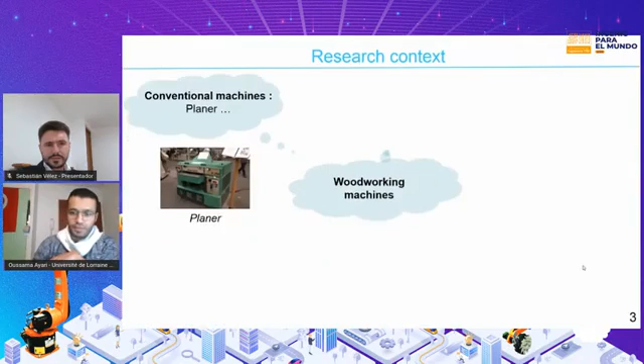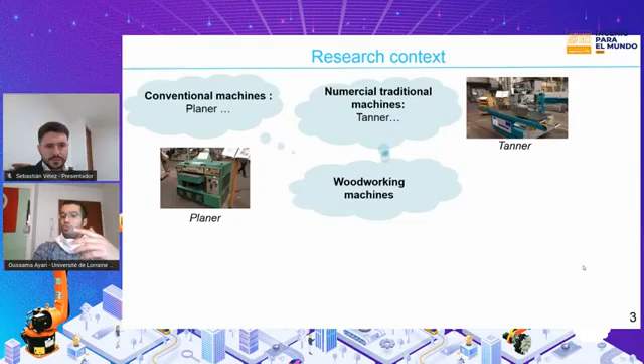So let's start with the research context. In the wood manufacturing industry, we find a lot of woodworking machines, like conventional machines such as planers, numerical traditional machines like the Tanner. We also find the CNC router, which is frequently used for milling wood and which can have 3, 4, or 5 degrees of freedom. And we find also, but rarely, industrial robots. Our work will be interested in this kind of machine.

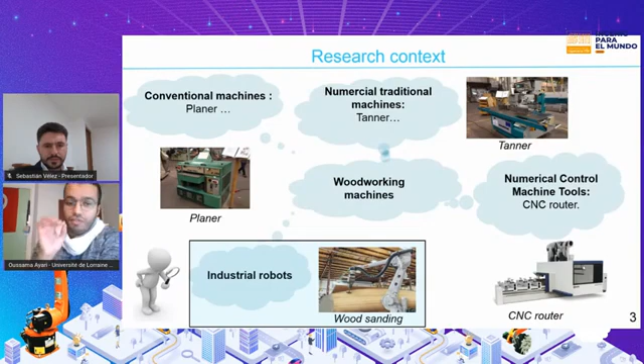So, talking about robots, there are many types used in the manufacturing industry, such as autonomous robots, AIV, meaning automated intelligent vehicle, and AGV, automated guided vehicle. As you see in front of you in the photo, I present a police robot. It's a robot used by the Tunisian government during the lockdown after the coronavirus pandemic. They use it to control citizens, to check if they are respecting health restrictions, if they are in good health, and a lot of other things.

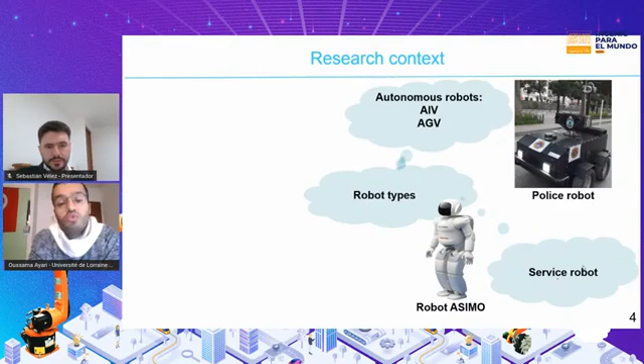So, the second type of robot is the service robot. As I present in front of you, the Asimo robot is frequently used in Japan, which can be used, for example, like a waiter in a restaurant, like a barista in a bar, and most frequently in retirement houses in order to support elderly people.

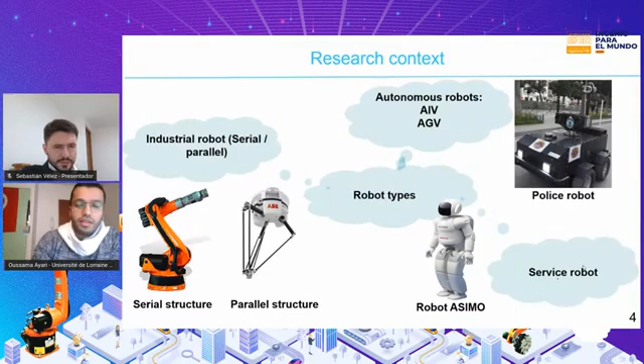And we also find industrial robots in two structures: the serial structure and the parallel structure. Our research will be interested in serial structure industrial robots.

Concerning numbers, the installation of industrial robots has not stopped growing since 2005 and has accelerated with the appearance of the concept of Industry 4.0 in 2011 and the trend to automate production lines. These two factors led to a number equal to 420,870 units of installed robots worldwide.

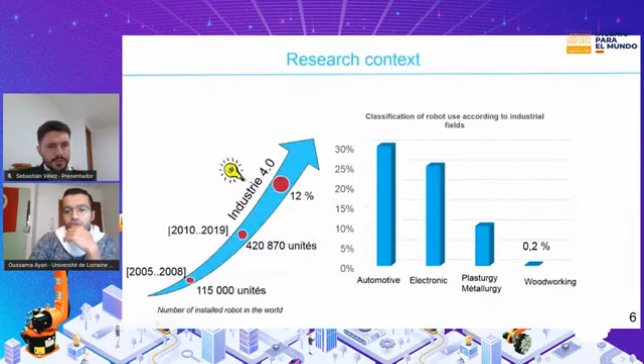The IFR, the International Federation of Robotics, forecasts in her statistics almost a 12% increase in the number of robots installed in the world by the beginning of 2021. But with the appearance of the coronavirus, we don't know until now if it will affect this number or not. Maybe it will increase, maybe it will decrease. We don't know until now.

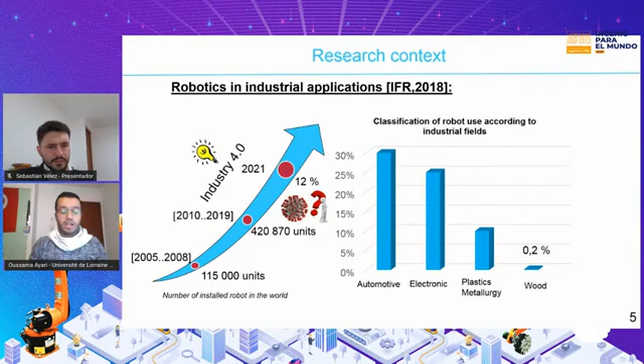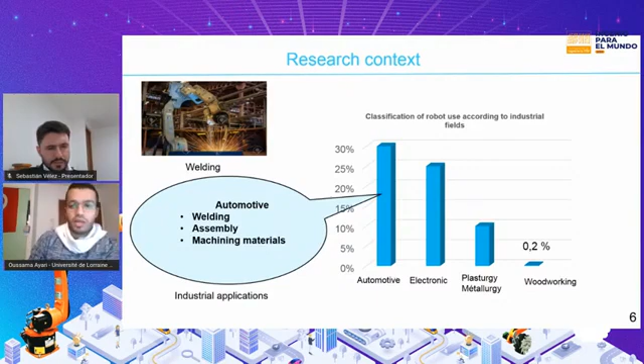So concerning industrial sectors, I'm talking about industrial robots in their serial structure, like the arm robot. Automotive field is always the first customer with 30% of the total number of installed robots, frequently used in applications such as welding, assembling vehicle or car components, and machining materials like aluminum, iron, and other kinds of materials.

The electronics industry comes in second place with 25% of the total number of robots installed in the world. They are frequently used to contribute to the handling and assembly of electronic components, as well as the development of sensor networks.

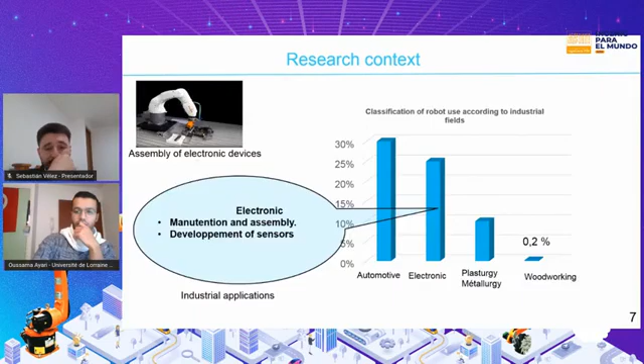In third place, the plastic and metal processing industry ranks in the world with 10% of the total number of installed robots, generally used for plastic machining or molding applications.

What surprised us, as people working in wood manufacturing, is that the wood industry is ranked last in relation to the previously mentioned sectors. The percentage of used industrial robots in the wood industry is not superior to 0.2% of the total number of robots installed all over the world. So it's surprising for us. It's weird, so we started making questions about that.

Why do other sectors like automotive, electronics, pharmaceutics, aeronautics use robots, and the industrial robot proves sufficient and suitable for line production, but we cannot use it for the wood industry?

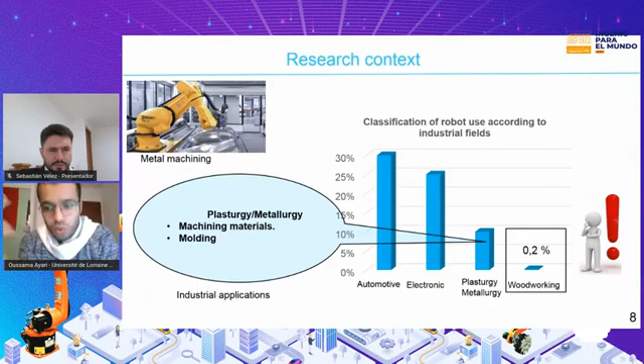So by making our research and our state of the art, we found that among the 0.2%, we find industrial robots in the furniture sector, still talking about the wood industry. We find it in the furniture sector, such as at Schmidt. Schmidt is a big company here in France, specialized in construction of kitchens.

They have like 40 robots, always arm robots - I am talking always about arm robots. So Schmidt has 40 robots used for loading and unloading wood panels on cutting machines.

There are also other applications, such as at Bourneuf, which uses a lot of arm robots for painting furniture. As far as wood construction is concerned, solutions are beginning to emerge.

For example, with Emax Pro. Emax Pro is a company in Belgium, a developer of robotic solutions for the wood industry. It has set up a small other company called A2C, specialized in drilling, carving, and nailing with arm robots, with industrial arm robots.

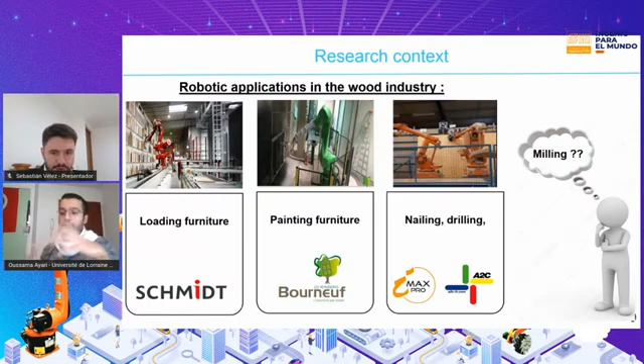So the goal or purpose of our research is to use serial industrial robots for milling, which has many advantages. First of all, production is more flexible in case the manufacturer needs modifications of the product. The robot program can be changed and modified without stopping the production lines.

Pay attention about this: now, for people using CNC routers or other equipment, if they want to change the program in order to personalize their product, they need to stop the production lines to make modifications.

But with the arm robot, the advantage is here with a concept called offline programming of robots. We can change the robot program without stopping the production line, which avoids losing money. The second advantage of using industrial arm robots for milling is a larger workspace in case the manufacturer needs to machine complicated shapes.

So let me first of all explain what a workspace means for an industrial robot. The workspace is the set of points that the robot can reach in space. For a CNC router, it can reach a lot of points which make the shape of a square. But for arm robots, we don't have a specific shape of the workspace, but the definition of workspace is the set of points that the robot can reach in space. So this is the second advantage.

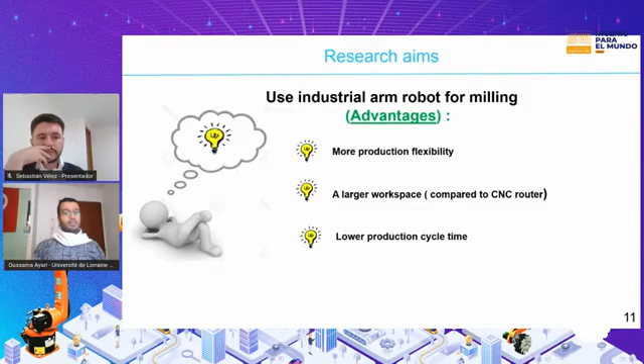The third advantage is we have lower production cycle time. Of course, with robots, as I said, if we can change the program directly without stopping the production line, we can earn time. And earning time means earning money, earning dinero.

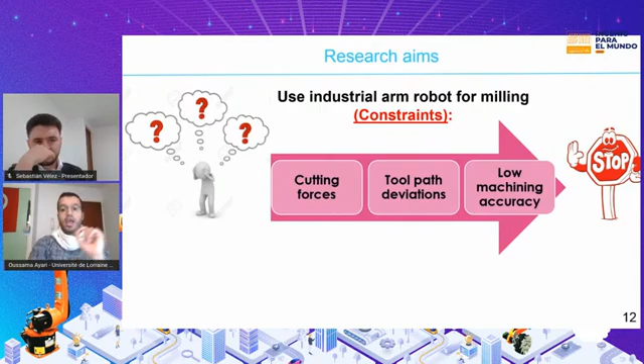But unfortunately, these advantages are faced by a lot of constraints, the most important of which is that when the tool removes material, important cutting forces are created, which cause toolpath deviations, and as a consequence we get low machining accuracy, and the machined surface will be very bad.

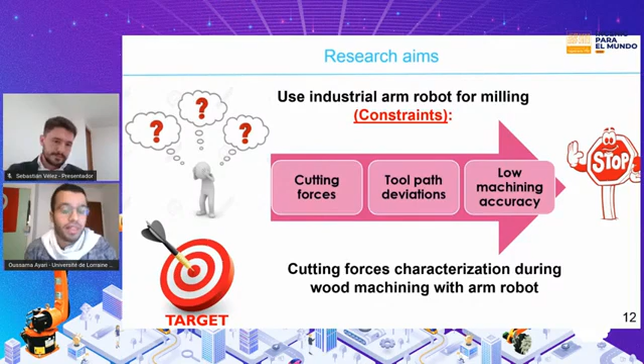So the target of our research is to characterize the cutting forces during wood machining with an arm robot. In other terms, we want to understand the phenomenon. We want to know those cutting forces in order to manage them: if there are important cutting forces, whether there is a solution to reduce them or to reduce the toolpath deviations. So now, after I explained the context and the aims of this research, let me present the devices and protocols used for the experiments.

First of all, and this is the most important device that we use, our experimental bench is composed of a poly-articulated or anthropomorphic arm robot. These terms are all names of an arm robot. We can call it a poly-articulated arm robot or an anthropomorphic arm robot. It is a KUKA KR 210. It has 6 degrees of freedom.

The last 3 axes of the robot are concurrent and allow it to emulate the moves of a hand wrist, as you see here in the last axes 6, 5, and 4. Their axes are concurrent, and they emulate the moves of the human wrist. And the first 3 axes, axis 1, axis 2, axis 3, serve to position this wrist in the workspace.

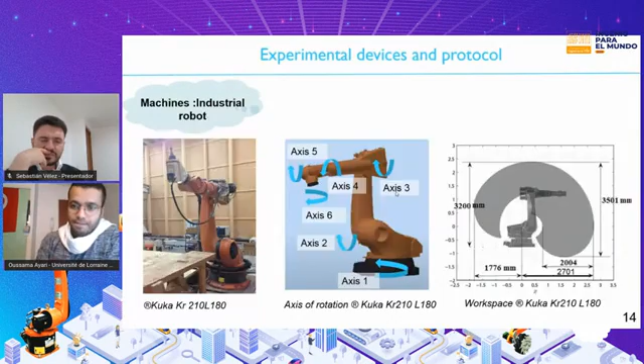With the robot, we have an attached high-speed spindle, used of course to rotate the tool, and the measurements obtained during machining wood with the KUKA robot are compared to ones obtained by CNC routers, always in the same experimental conditions. Maybe you are asking now why we want to compare our results with a CNC router. As I said, the CNC router is now frequently used in the wood industry, and using a robot is something new, not common. So we take the results from CNC router machining as a reference and compare them with the results obtained by machining with the robot.

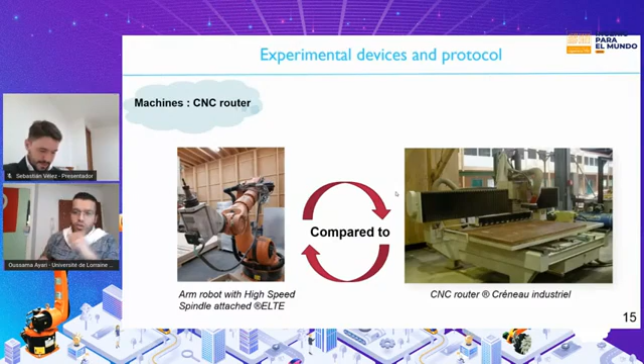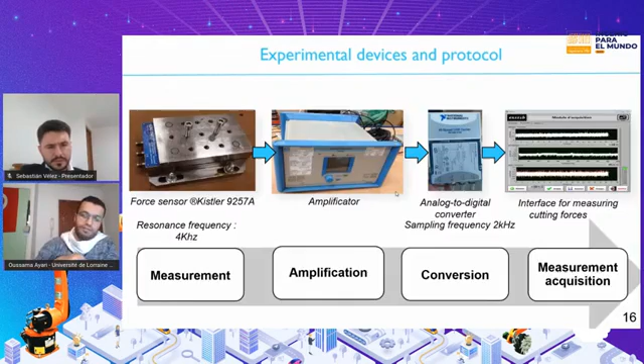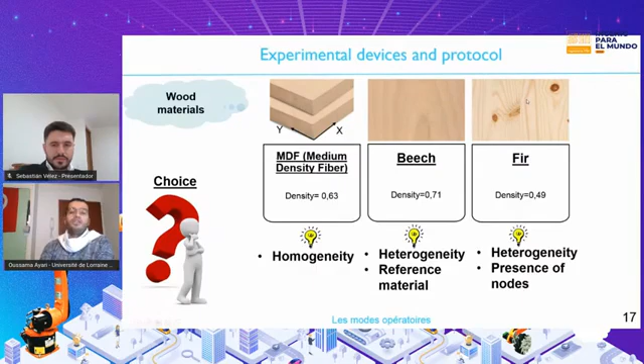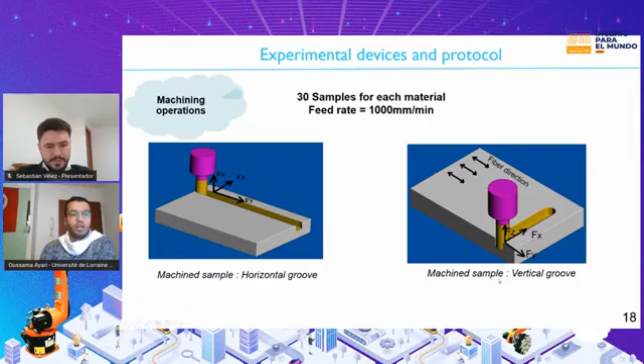So for the practical part, in total, 30 samples for each material are machined with a feed rate equal to 1000 millimeters per minute. Two grooves will be realized: one horizontal groove presented in this photo, and the second groove, which we call the vertical groove, presented in this photo.

For machining, we choose two configurations inspired from a stiffness map of a similar robot. So first of all, let me explain what stiffness means. Robot stiffness is like the rigidity of human hand resistance. For example, to handle a chair, your hand doesn't apply the same force when you are taking the chair like this, or like this, or like this. The hand doesn't apply the same effort, and each time the resistance or force of the hand is not the same.

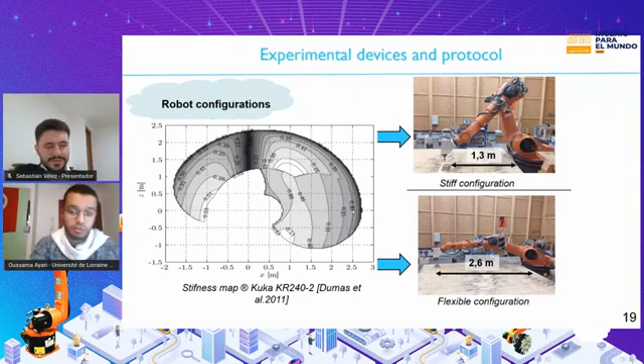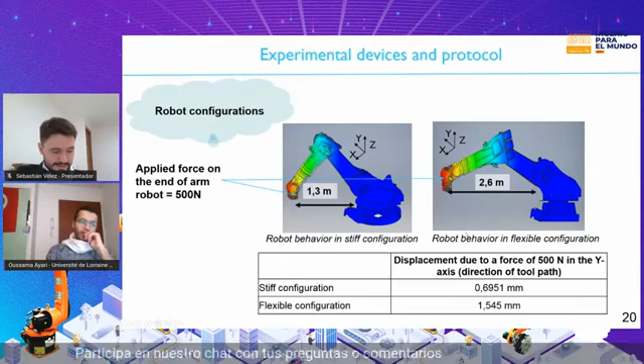As you see here in the table, I show the displacement due to a force of 500 newtons in the y-axis. Why the y-axis? Because it's the tool path when we are machining. The results show that in the stiff configuration, by applying a force of 500 newtons, the robot moves by 0.6 millimeters. In the same experimental conditions, with 500 newtons, in the flexible configuration, we register a displacement of 1.5 millimeters.

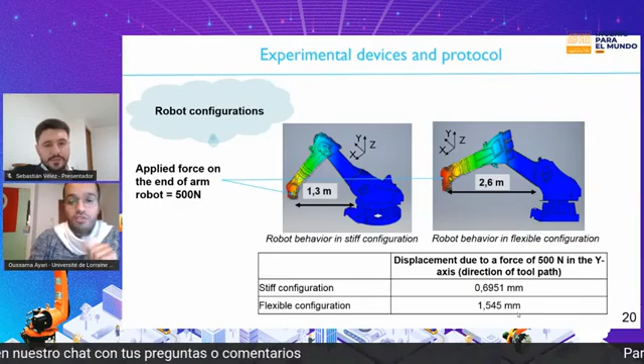So those results confirm our hypothesis that the robot is less resistive when the end of arm tool is far from the robot base. This will affect the cutting forces a lot afterwards.

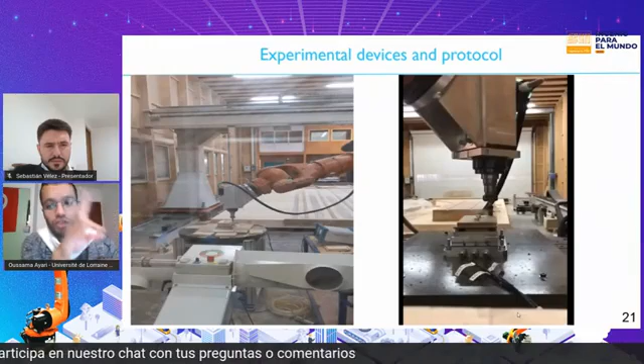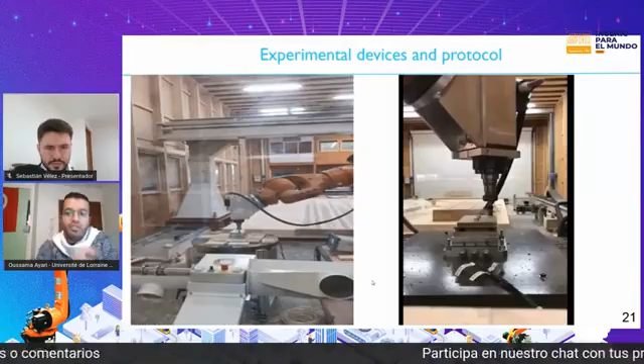So now to summarize the part of experimental devices and the protocol, I will show two videos that illustrate the machining operations. The first one consists of machining wood in stiff configuration and shows the interface. As you see here, this is how we measure the cutting forces. This is the interface for measuring cutting forces.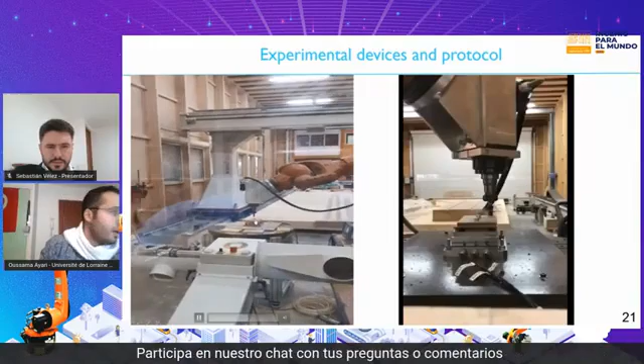And we always start by calibrating the sample in order to avoid simulation errors. And after that, we make the groove. As a reminder, the feed rate is always 1000 millimeters per minute. So this is the first video.

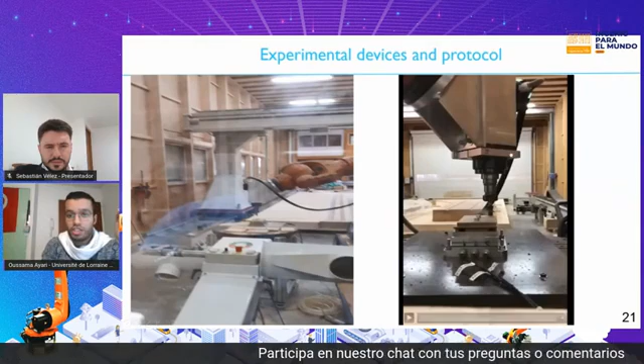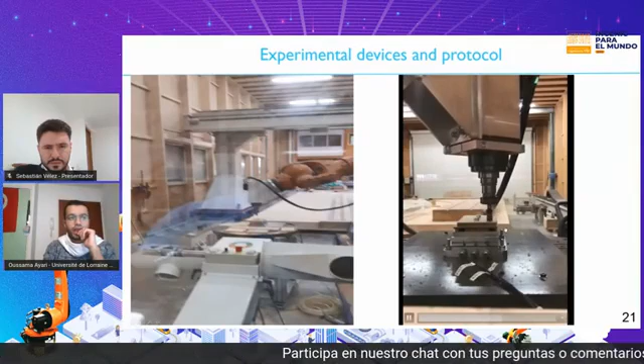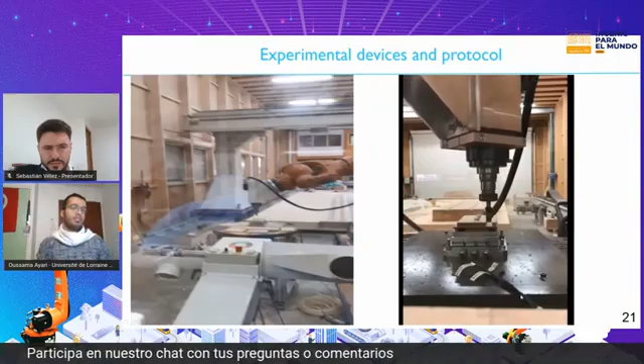The second video is the same machining operation, but with a zoom and in slow motion. As you see here, we are always grooving. This is what we call the cutting forces sensor. It is linked to an amplifier and an analog to digital converter, and after that, the forces are displayed on our computer. Okay, let's pass on.

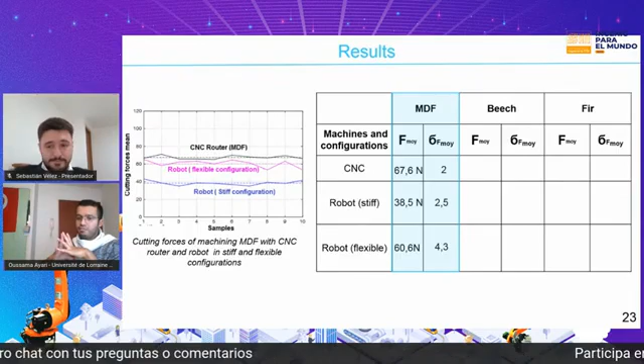Now, after explaining the experimental bench as well as the follow-up protocol, let's see the results together. As a reminder, we will compare cutting forces measured with the CNC router and the robot in its stiff and flexible configuration for three wood materials: MDF, medium density fiberboard, beech, and fir. For the MDF, as you can see, the measurements show different averages of cutting forces. The variations are intensified by changing the machine from CNC to robot and the machining configuration from stiff to flexible.

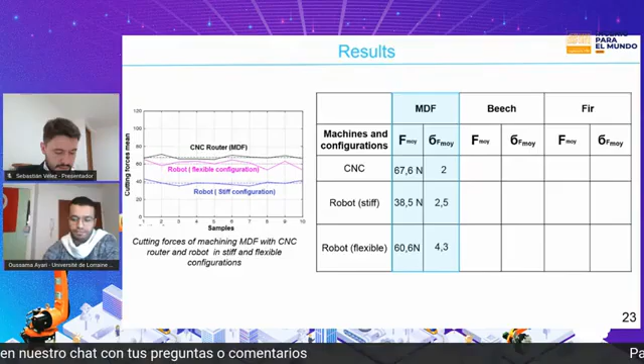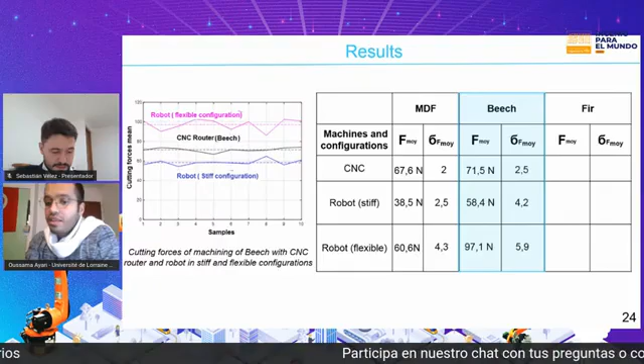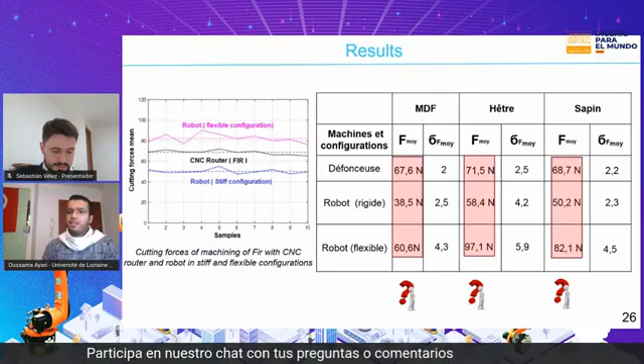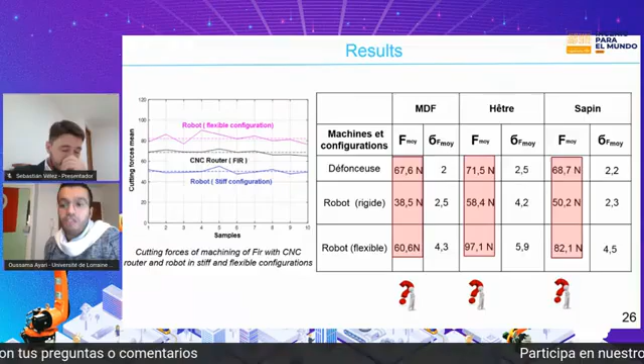The same trend is found in beech machining, where higher cutting forces and fluctuations are measured due to the heterogeneity of the material and its high density. Same with fir machining, the measurements obtained vary depending on the machine and its configurations. The main finding is that machining in stiff configuration produces cutting forces that are almost half of the values obtained with the CNC router and the robot in a flexible configuration.

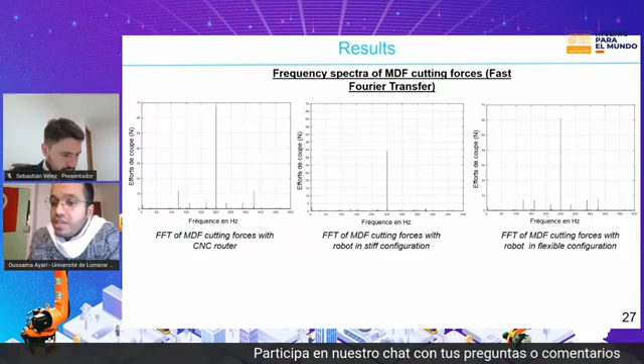In order to explain this phenomenon, we did what we call a spectral analysis of the acquired MDF signal, and we found the presence of harmonic frequencies with the CNC router and the robot in flexible configuration. What I call harmonics are those parts of the frequency. Only with the CNC router and with MDF machined in flexible configuration did we find those kinds of harmonics. However, these harmonics are absent in the frequency spectrum of robotic machining in stiff configuration.

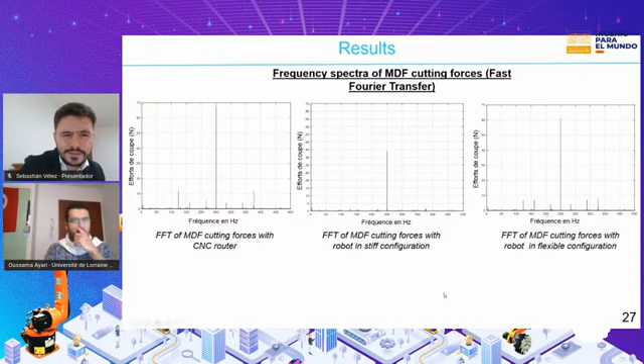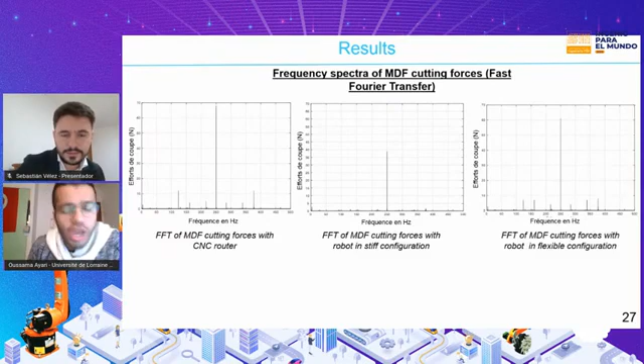This leads us to believe that there is a loss of energy and that the robot in stiff configuration absorbs the machining vibrations. The same results are found with beech and fir. After that, to answer our curiosity, we machined beech perpendicularly to its fiber direction. In the first experiments, we machined the groove parallel to the wood fibers. Now we changed the direction of the machining tool.

Now we machine perpendicularly to the wood fibers, and we notice that tangential and radial cutting forces are 8 times higher than the measurements obtained after the horizontal groove. In other terms, beech or other woods that contain fibers are not like MDF. In MDF there is no fiber, there is no line. But in beech and fir, there are lines.

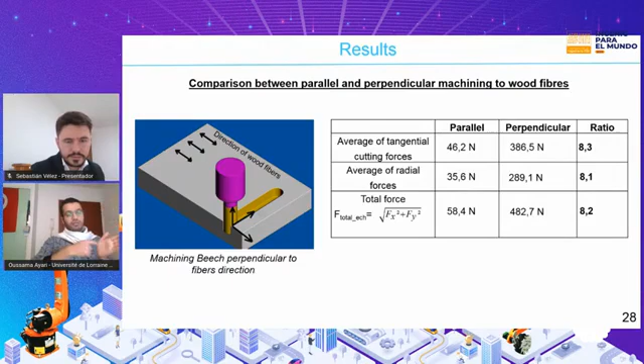When we are machining parallel to the fibers, the forces are 8 times less than when we are machining perpendicular to the wood fibers. In other terms, when the robot is machining perpendicular to the wood fibers, it needs to apply 8 times more cutting force than when machining parallel to the wood fibers.

After that, we wanted to see the knots' effects. As I explained, knots are the irregularities we frequently find in fir. So in this experiment, we want to see what happens in terms of cutting forces when the tool enters or machines those knots. So we machined it by passing the tool through those knots.

The results reveal that when the tool machines a knot, the cutting forces undergo a sudden and significant increase that can reach double the force outside the knot. As you see here in this photo, here we are out of the knots, related to this part. The tool is out of the knots, and we have cutting forces of almost 100 Newtons. But when we enter the knots, we have a significant increase in cutting forces, which can reach double the forces registered outside the knots. So this is the effect of knots.

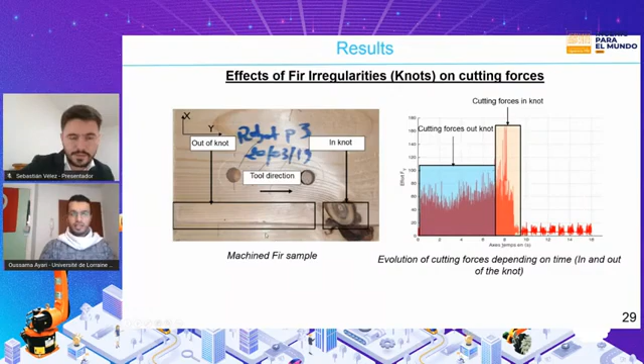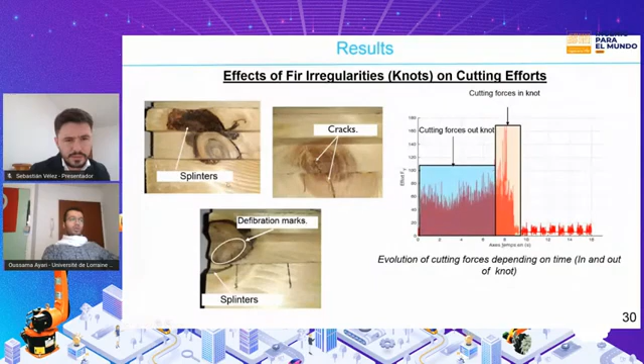After that, a sudden change of those cutting forces generates significant damage. As you see here, when the cutting forces are suddenly increased, we can see a lot of damage like splinters, as you see here, cracks or fissuration. We can see also defibration marks.

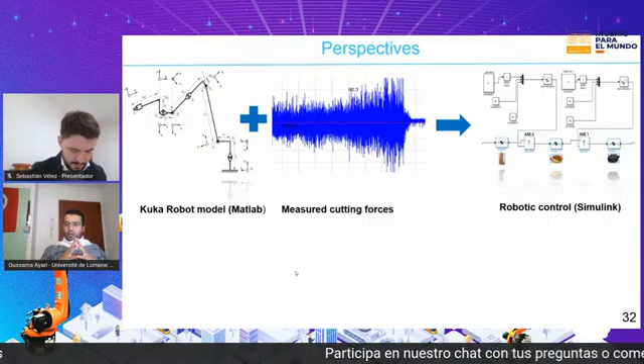So now I will finish with some perspectives. The first one, our goal for the next step: we will gather a robot model with measured cutting forces and inject them. The robot model is developed on MATLAB, and the measured forces are obtained with the instrumented line. So we will gather both of them and inject them in MATLAB Simulink, in order to create a new robotic control depending on measured cutting forces.

I will give more details here. So now we have our model. We'll start by modelization of the robot in MATLAB. After that, we have the measurement of cutting forces when the tool is removing material, of course, wood material. So now we will gather both of these and inject them in MATLAB Simulink in order to create a robotic control that makes the robot able to adjust its position during machining.

In other terms, when the robot is machining, the sensor will send the cutting forces to the robot control that there is a high cutting force, and the robot will understand that and instantly adjust its position in order to respect the tool path and to improve machined surface quality. So the purpose of all of this is adjusting the moves of the robot when it is machining wood. This is the first perspective.

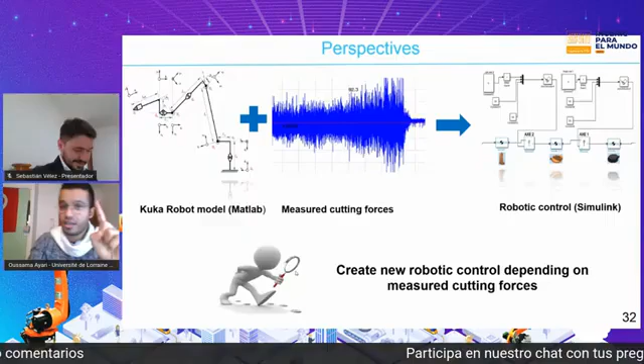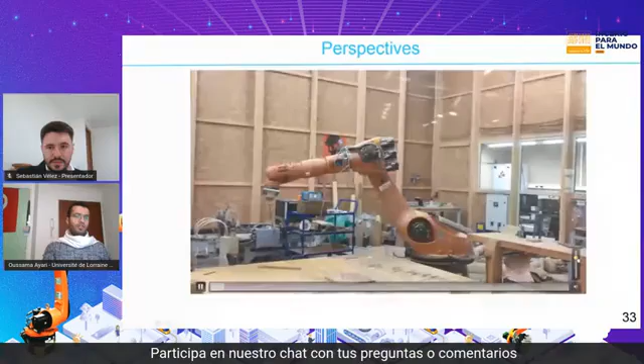The second perspective is a little bit special. To answer our curiosity, we will change the machining concept. Let me start the video. So as I said, we will change the machining concept. The samples and the force sensor, as you can see here, are attached to the end of arm tool, and the spindle will be fixed on the ground. This experiment aims to see what happens in terms of cutting forces and robot vibration on its articulations.

So maybe you ask why attach the samples and the cutting force sensor to the robot. Why don't we simplify things and machine the wood on the table like a normal experiment? Because some industrials asked us whether they can improve their technical company environment by putting the robot in the middle of a lot of machining devices, and the robot will take the piece of wood to machine number one here, grooving, for example, and after that, drilling, nailing, other operations.

So they said to us, let's see what happens in terms of cutting forces when the robot is in the center of a lot of machines, and the robot takes the wood piece with the gripper and starts displacing this wood piece from one machine to another. So this is special, this is new, and our perspective now is to see what this concept will give in terms of cutting forces and of course accuracy and machining quality.

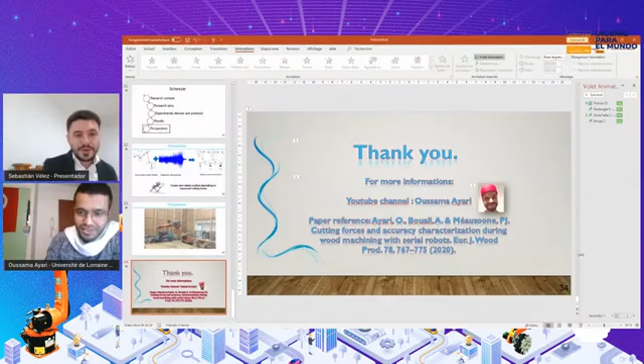First of all, we have a question from Norma Guarnizo. She says something like, in which direction were higher forces generated when you were studying cutting in knots? In which directions were the forces higher when you were machining the knots? I don't know, when you were drilling or grooving.

So when we did the grooving operations in knots, the objective was to see how the cutting forces behave out of knots and in the knots. So it was on purpose. We put the samples that way on purpose. We wanted the machining to start out of the knots, like normal wood, and after that, at the end of the operation, we get the cutting forces.

We are sure that at the end of the cutting operations, the tools were in the knots. Otherwise, for example, you could find the knots in the middle of the samples, and when we get the results of cutting forces, we are not sure exactly where the cutting forces are related to the knots. So on purpose, we always put the knots at the end of the cutting operations in order to be sure that the cutting forces acquired there are the cutting forces of the knots, not of another part of the sample. I don't know if I answered your question well or not.